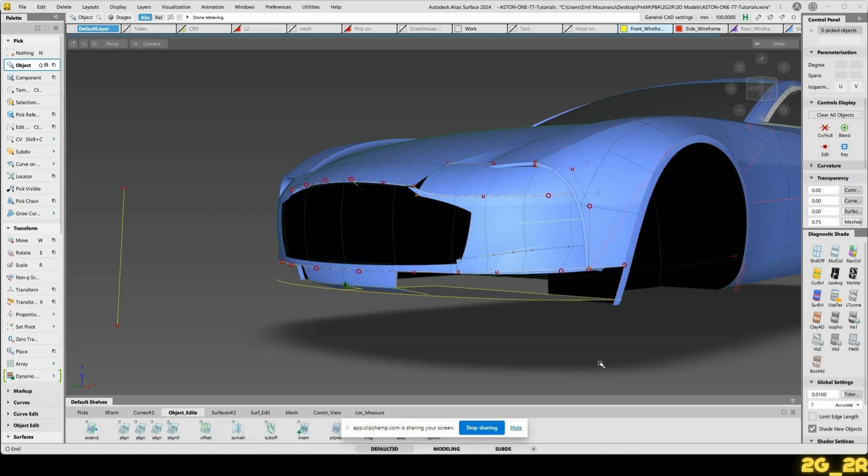So after a short break, I'm back to show you how I'm gonna fill up that area there. So let's bring back the mesh. We see here that we don't need to tuck in here that much, as we're following that area pretty well.

What I'd like to do is take that and follow a little bit more the mesh. So I'll move this out. In the Y direction. And I'll add a few more CVs to this. Now this one needs to move out.

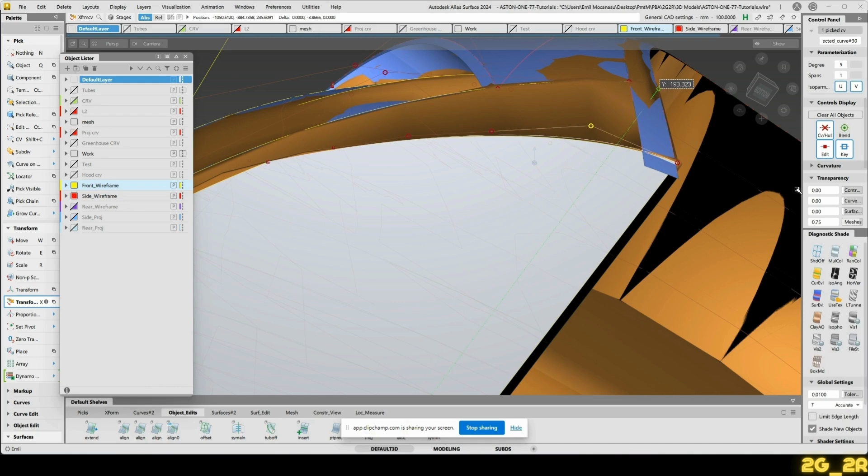Or what we could do, I kind of like this line, but if I want to stick to this scan here, we'll have to take care of that area. So what we need to do here is this line. We'll have to move in ever so slightly. There we go.

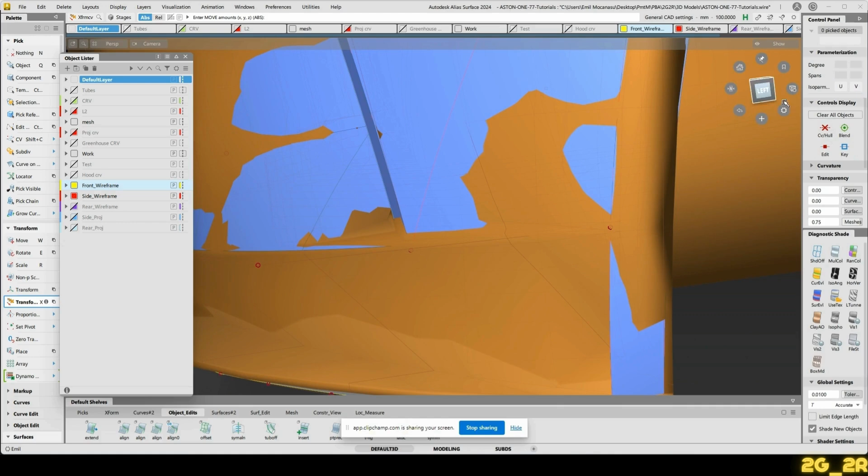And then for this area, I will detach a patch up to that point there and twist it in a little bit. That can be done easily by projecting a line in the side view onto the surface. That will be the line. Let's hide away the mesh.

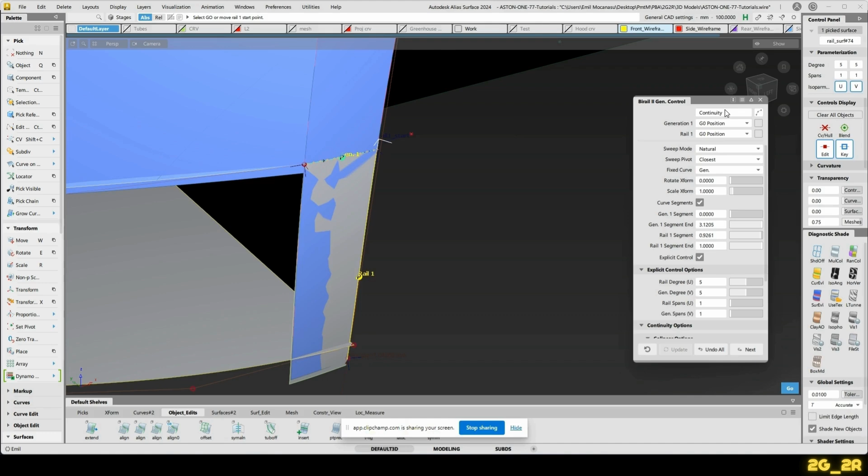And then the easiest way would be to do actually a monorail off of that curved surface along that line, but we will have to turn on curve segments. So that along this line here, and what we do is make sure that curve segments is turned on, and we'll take this controller and we snap it to that point there, and then make sure that generation 1 is set to curvature.

We can trim this back. We keep only that upper area. This we can rotate in a couple of degrees. Bring back the mesh. Then we can start rotating it even more till it looks more like the mesh and what that is doing there. So I would say 8 degrees. We'll do just fine in that area. Perfect. Okay, well, that's that.

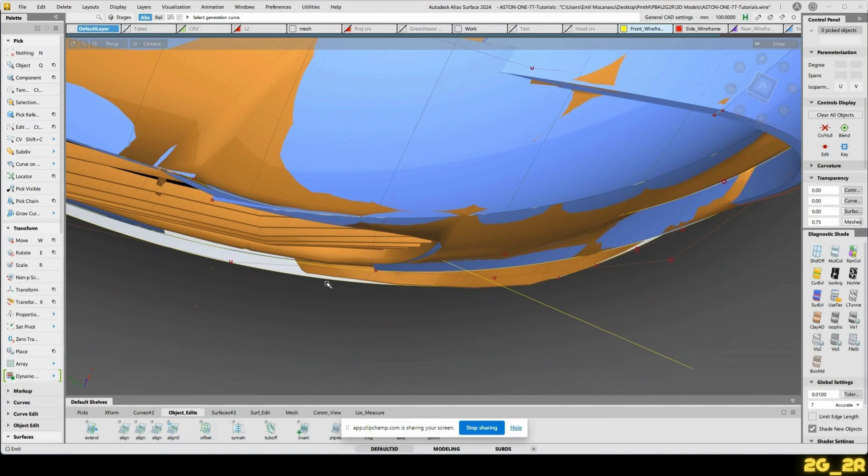I have that line parallel to that one. What we can do is take that last CV out a little bit. Let's just follow the scan in this case. Take this in. This last one out.

And then we extend this line here. It crosses this one. This one goes to that point there. This one take in a little bit. This one more. So for the sake of resembling to that mesh model, I will take that as is. Okay.

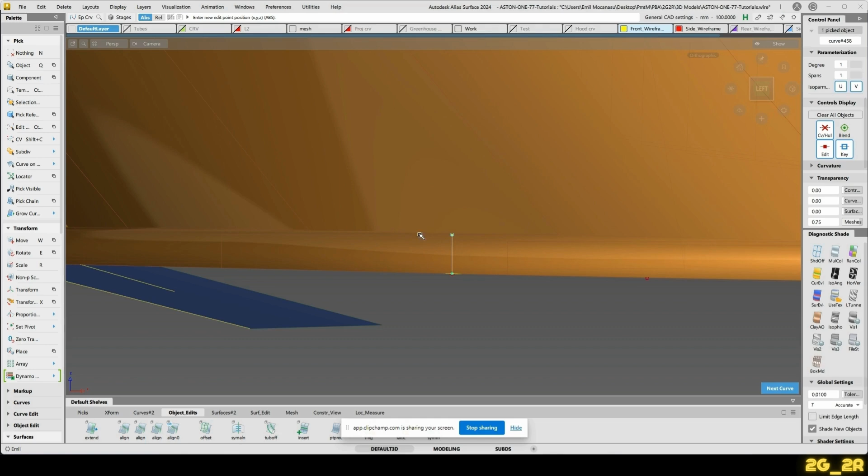I will take also degree 1 line and give it that height that we've got on that plate there. And now I can run this as a monorail on this curve. Here we can give it a tiny bit of crown. Coming out. This one going in. This one going in as well. This one can move out in the Y direction. There we go.

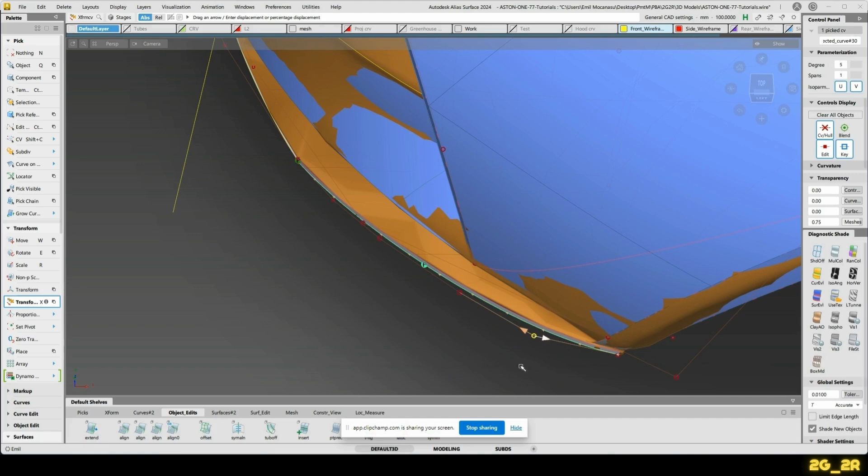You can slide this one in this direction. This one slide this way. Does it? This one can slide that way a little bit. We'll make sure that this is shorter, this one is a bit bigger, this one is the biggest one. Then same again here. This should be the shortest one. So let's pull that way, a little bit out. There we go. The line work has to look as good as it can be.

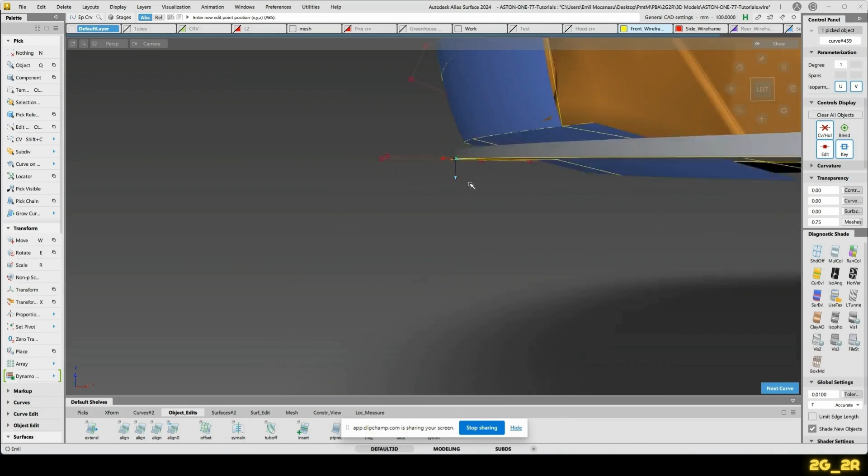Now let's profile this line here along that one. That gives us that face there. And now let's delete this one. I like to work from the center line always. So I'll snap this here, go up, and then snap top of it onto that profile there. So we know we've got the section we have there. And what I'll do, I'll stretch this line to become that from there. So I keep my profile, just delete the second curve that I've done.

Okay, now this will allow me, let's take care of this. This will allow me to do the same thing, but using the natural edge of that surface there. So monorail that along that line there. I'll turn off the curve segments and the explicit control. And I will keep this pretty simple and basic.

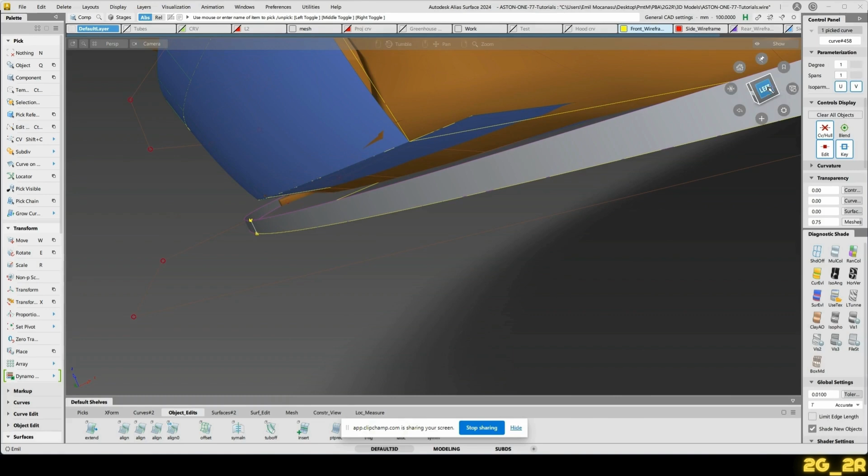What I want to do is maybe add a bit of crown onto that line there. I don't want it to be flat. I want to give it a bit of movement in the section to make it nicer. And this in turn will help us when we will be doing the radii. And now, based on that line, let's generate here a straight line like that. And profile on that line there.

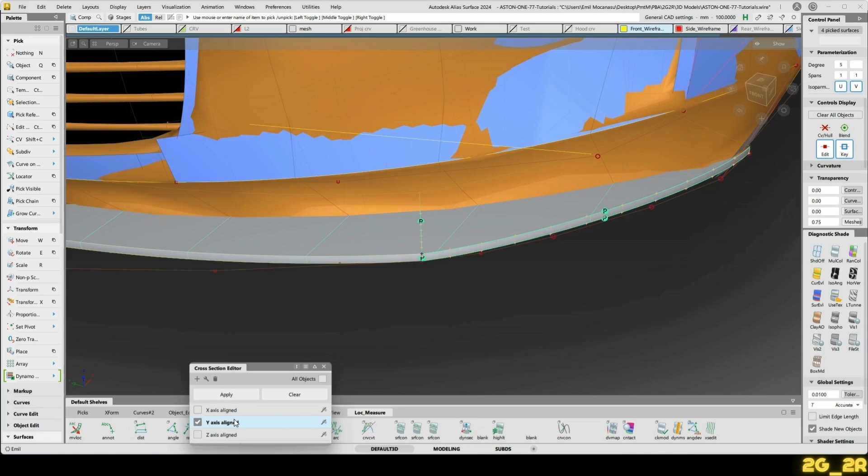Make that curve bigger. So I've scaled it. Now I'm going to run that edge along that one as a monorail. This is the main volume for the splitter. So look at the sections there. We are getting pretty close there. That's fine. These could get smaller. Since we're here, fine.

Let's do it this way. Can make that line ever so slightly shorter. And I'll snap this line to that point, closing everything back up. Let's see how we're doing. Here, we could get closer. Here as well.

What we need to do now: take these two curves, go to the CV there, and snap them back to the center of that curve. All the volume will follow. So we're sitting well there, there. Here we are a bit off. We can tone it down a little bit here, a little bit here.

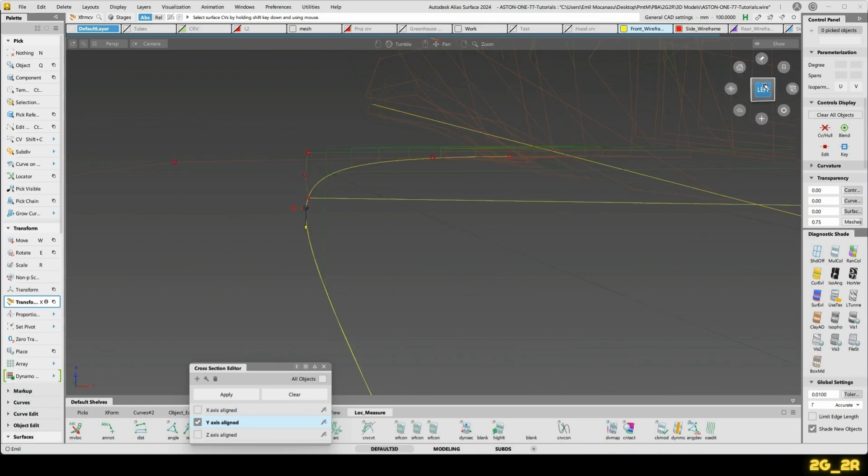And then we will have a blend in this area because it's not going to stay that sharp, so that's all good there. And we could shorten that side a little bit, the center. So I'm going to shorten it even more. And then snap that point back there. And now we're sitting even better on those sections there.

Okay. So most of them are sitting well. Here we're a bit below it, so I will leave this as it is. Come out here a bit. There we go. I'm going to go in a bit. That's that.

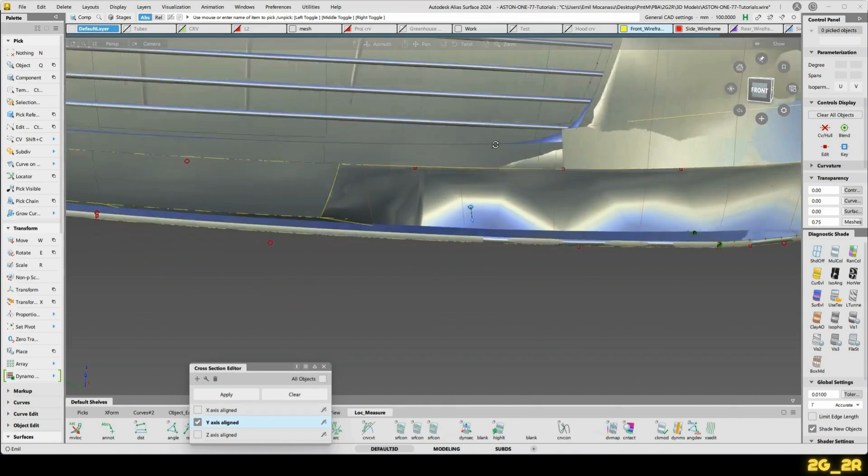Now we will need to generate these surfaces here. One easy and quick way to do that would be to take that curve and move it down there, build a skin between them, and that's it. So I'll try to do exactly that. Let's get away with this. This is interesting here, the way it twists.

So I will be taking that line that we've got there, and I'll just copy it in there, skin between them, or we'll use that edge, that line, and one more there to generate actually a bi-rail there, and then we will be adjusting it so it gets that feeling that the surfaces have got there. So let's do that. Let's set that line, copy paste it, move it across there. Don't worry about the overbuild, because that's exactly what we want.

Now, to make everything a lot faster and easier, I will still generate skin between these two. And to get that in quickly, I'll get some sections here. Perfect. Now what I'll do, I'll just non-proportional scale this line. There we go. We have our section sitting pretty well here.

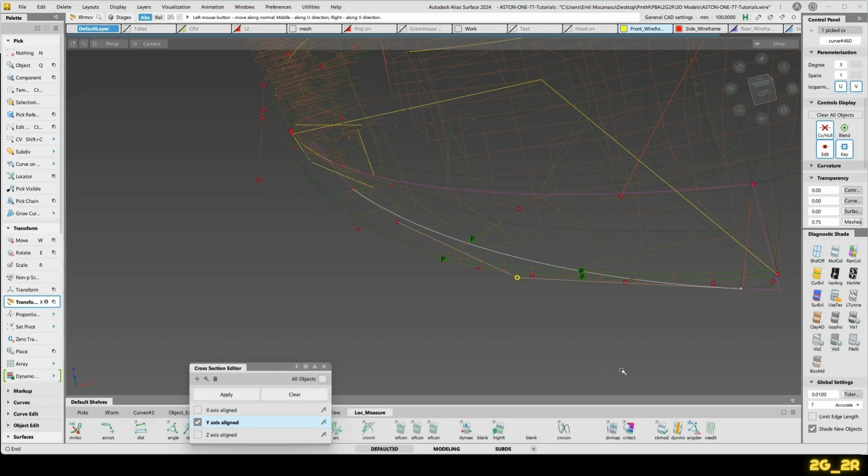Now what we can do is just adjust this line a little bit. So I'll non-proportional scale it in the Y direction because I'd like to have a bigger surface there. Let's use the extend option there. That's good. Let's scale it back in X direction. All good. This last point, both working well. Since we're sitting pretty good on most of those sections, I'll leave that as is, and I'll accept that deviation there from the scan because it's going to make the surface look better. Looks okay.

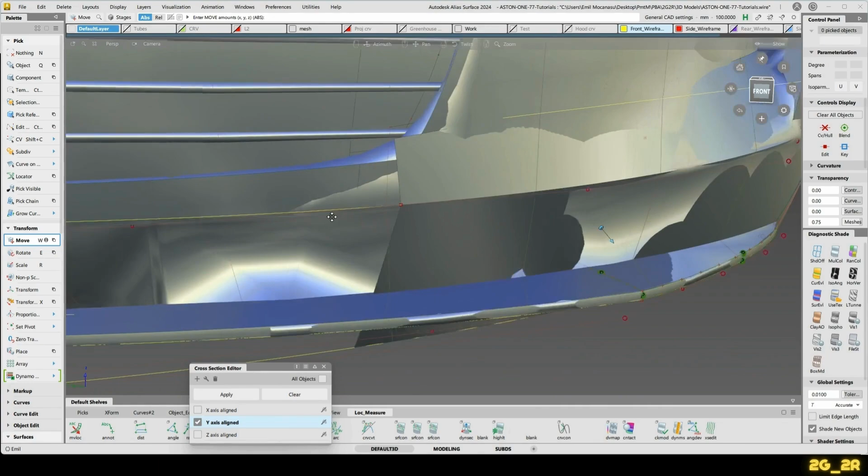The outline, the surface, and we know that this curve is aligned to this one curvature. So we can actually generate here a monorail, connect the curvature. We will be using only this side of it, so that's okay. Let's run some sections on this one, see how we're doing.

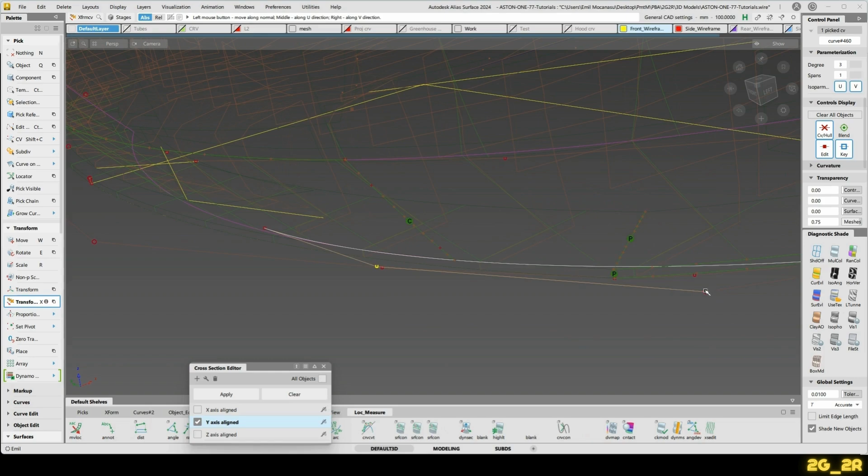So we can actually move this in a little bit. There we go. This could come out ever so slightly. This one as well. So we have that there. That's looking good. Now, the interesting part will be going from that surface to that line, and by the looks of it, I think I will be just blending curvature to position onto that line there, and that's it. So let's go ahead and try and do that.

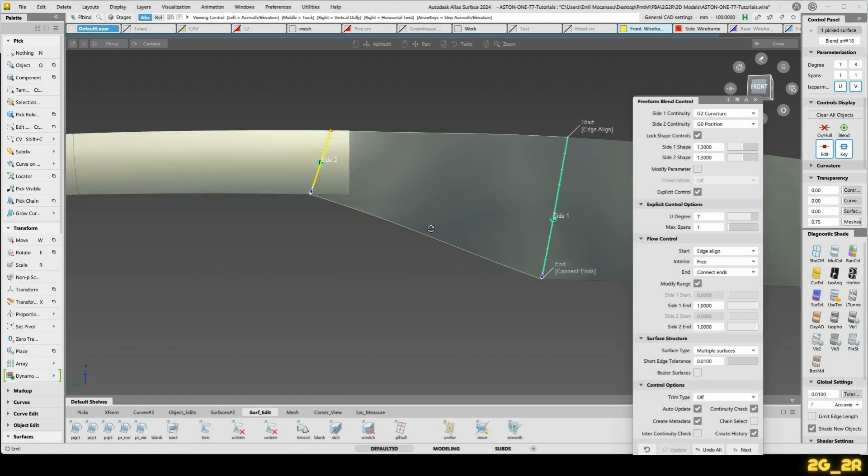So from here, I'll bring in a line that looks, actually what I'll do, I'll do it even easier. Let's untrim this surface and then go with a blend. I'll align this edge line. This will be connecting, and I'll do curvature to position there. And I'll just take that curve there and duplicate it. Make sure that the shape of that blend is set on to 1. I'll duplicate that.

These are very easy and quick ways to generate surfaces. See where you're roughly at, and then generate your nice curves and work from them. There we go. This control. Side 1 will be set to curvature. And we know it's working. We can trim this back. Sorry about that. Now let's look at this section wise.

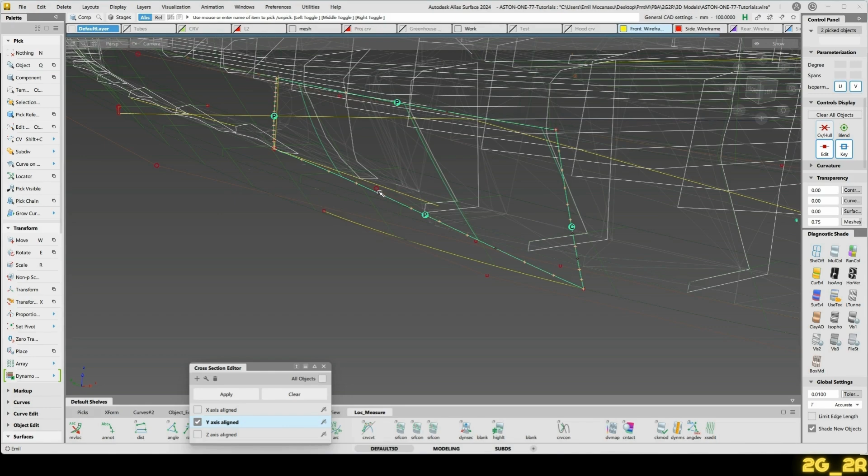Deviating a little bit. Let's look at this one here. So we could come somewhat closer to the sections on the mesh model, because we are a little bit off. So that line needs some adjustment. There we go. That brings us pretty close.

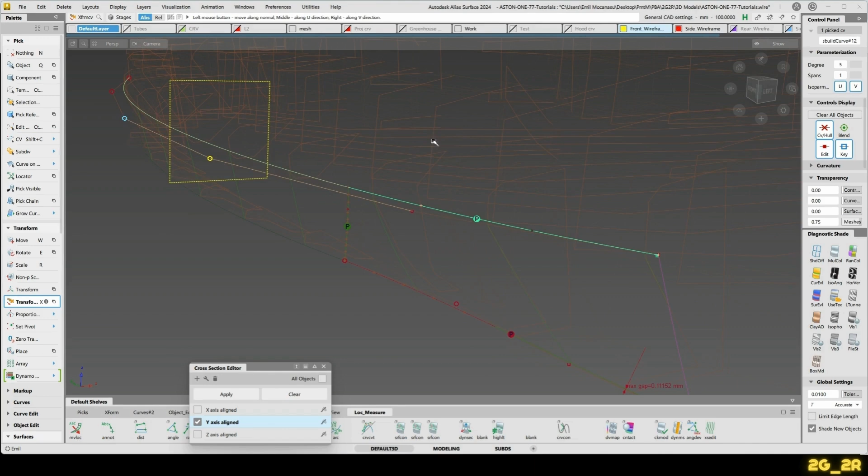It's even closer now. That's sitting pretty well there. Let's see what we have to close back up. Since we've moved some curves, others will follow. Let's hide away the mesh. As I was saying, things are not happy.

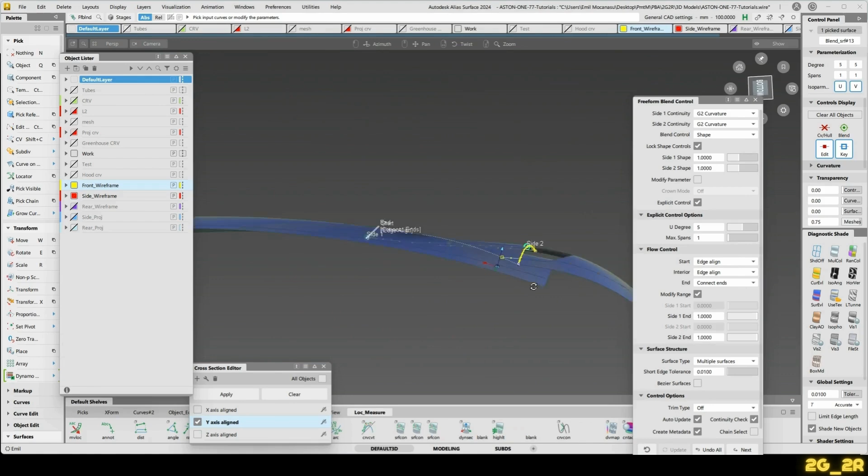It's a common problem that you get when you work a lot with freeform blends in these surfaces. This one jumped from where it should be, and it's aligning to a different surface there. And this is the reason why. So let's go back to that line there.

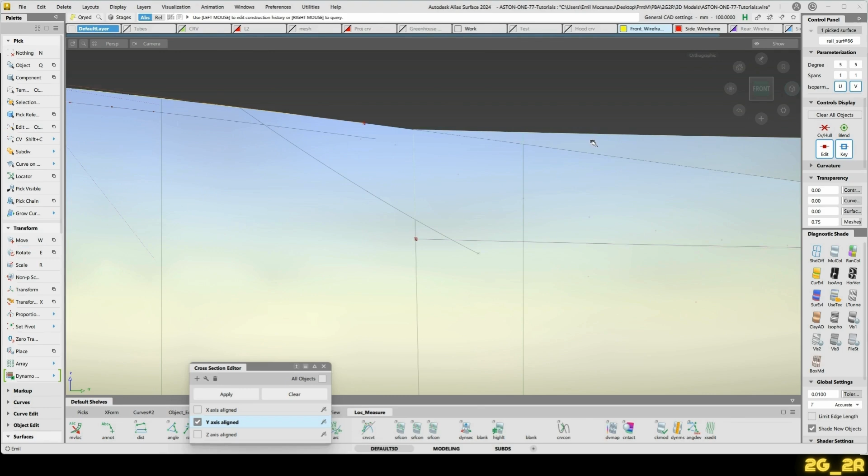This line needs to realign to that surface. See the result of this closing back up. Still not working. At least that's working, so we can rebuild this. Entering the surface again, this one.

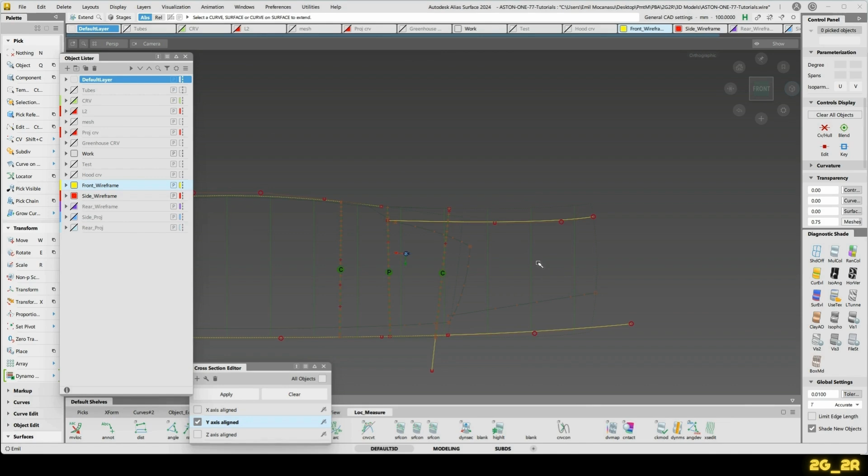Sometimes this is the cost of working with these flexible surface structures to keep the history. Sometimes it's just not working. So like that, on that line, so it hits the top there. I've overbuilt this. I'm going to normal project onto that surface, that line. And I'll just make sure that I reproject these lines to make sure I keep everything that I had in place before.

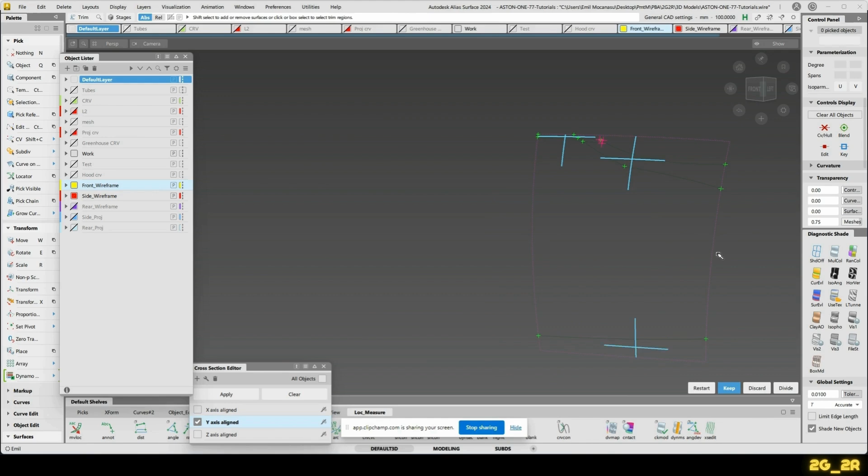So I've reprojected everything. I'm just trimming it back to keep just what I need. That's about it. These would go onto their proper layer. Now I need to see why this one is not working.

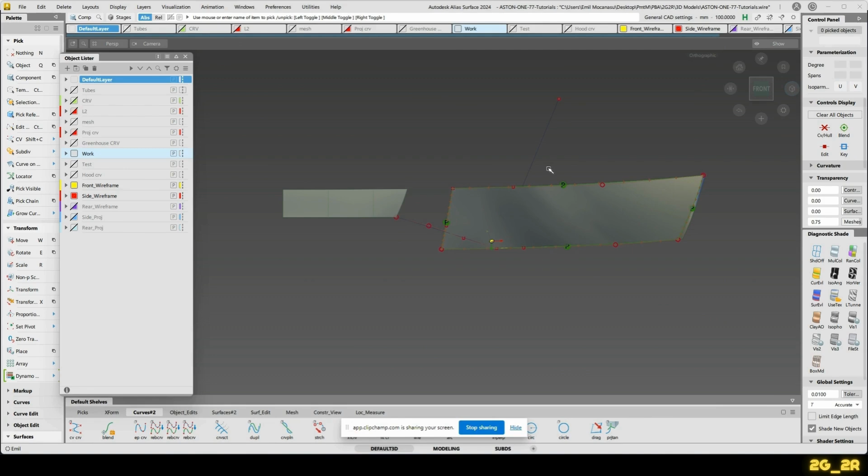And now let's make a projection from that onto that one. We'll need to see where this curve lands onto that surface there. So with a stretch tool, I'm just project aligning that line to that endpoint of that curve. Projecting in the X direction. And now let's do this again.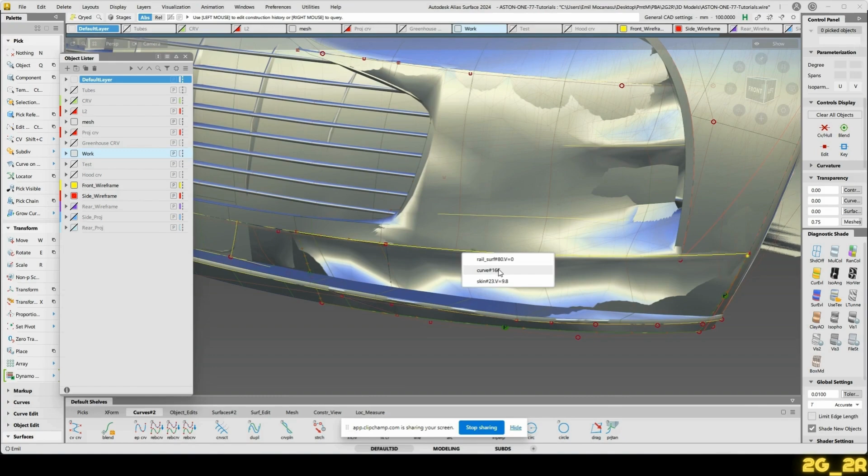Since I'm aligning here, that's where it should happen actually. Let's bring these curves back. Let's see all this compared to the mesh. That curve needs to align to that endpoint there. This needs to come out. Okay. Now the mesh needs to go back and go away again. Let's bring these back up again.

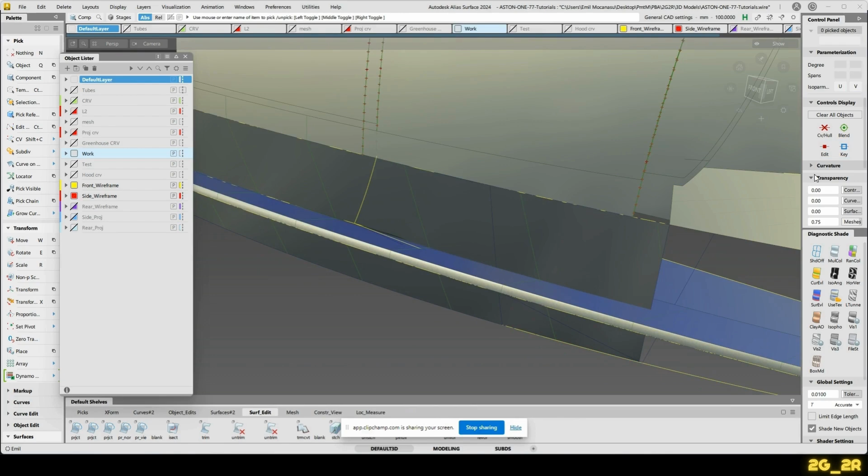So let's introduce here one more surface. Basically, a transition from this one all the way there to that surface. And by default, this gets trimmed back. This one gets trimmed back. That will serve as that transition that we're missing. Let's project onto that surface this curve here. There we go. We'll take that curve that we have there as well. This one as well.

And then I will turn on the CVs on this. Snap this roughly to that position. Well, it has to be exact. Roughly doesn't do it. And we will be using now that edge of that surface to build the surface we were missing here. And we're still not aligning properly. It means that the surface that we've got there, these two curves, we have to bring them back together.

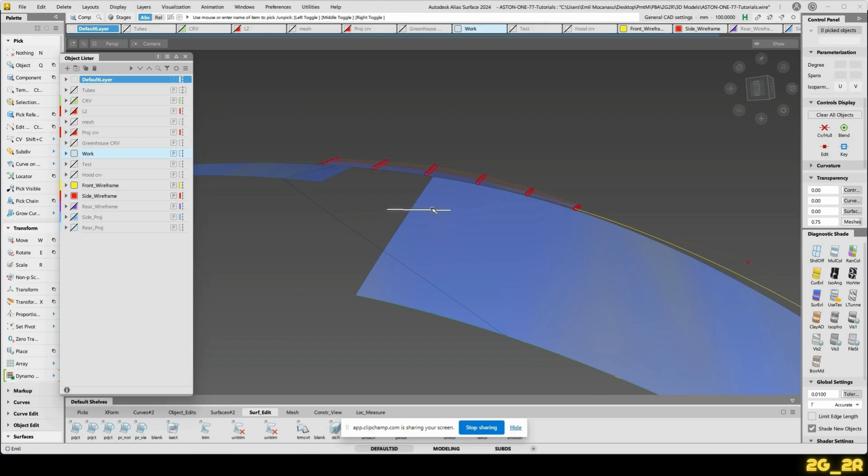We will need this curve, this one here. Let's extend this curve back to that line there. This curve, we just pop it onto that one, and we'll snap it to that one there. So this way we will have a natural edge here, and we can build that again. There we go. Let's bring back the mesh. Try to optimize this a little bit. And that means that we will aim to get that working nicer.

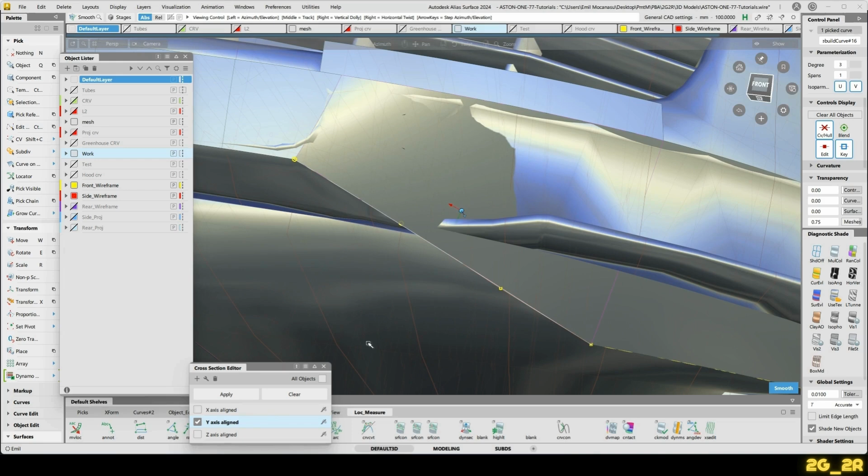So here we're okay. That curve could become a degree 5 curve. And we can push this in. This one also in. We can go even more in. So since we've got that happening, it means that in this area we actually need a surface coming off of that line, going steeply in, intersecting with another surface coming this way. We'll have a blend that way, and then the radius going this way. Because if not, the S here will be too strong, and I'm not so keen on something like that.

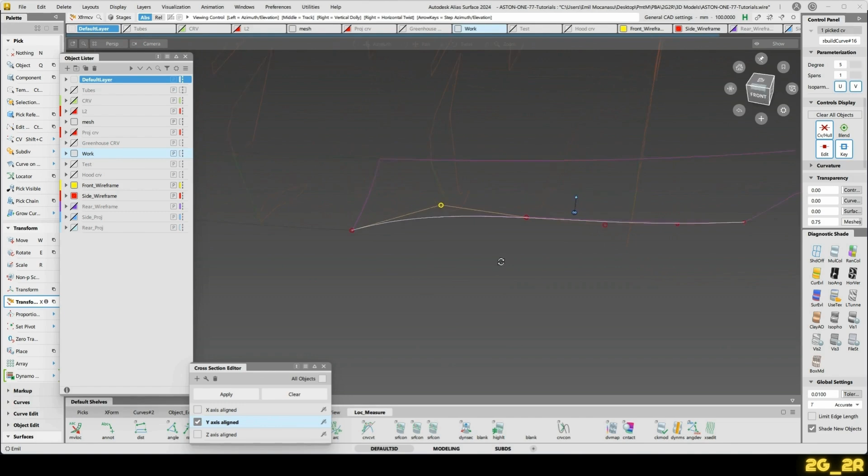Let's try this out of one surface first. This one goes in as well. This one can come out. Not something I'm very keen on. Let's see the whole situation together. Now this surface. This will run to a certain degree. We can extend that curve, which in turn makes that surface bigger. We'll take these two, hide them with that one. This curve can be adjusted to push that point down. This one can come in a little bit, so we're resembling that even more. Now we're okay. And on the explicit control there, 5 by 5.

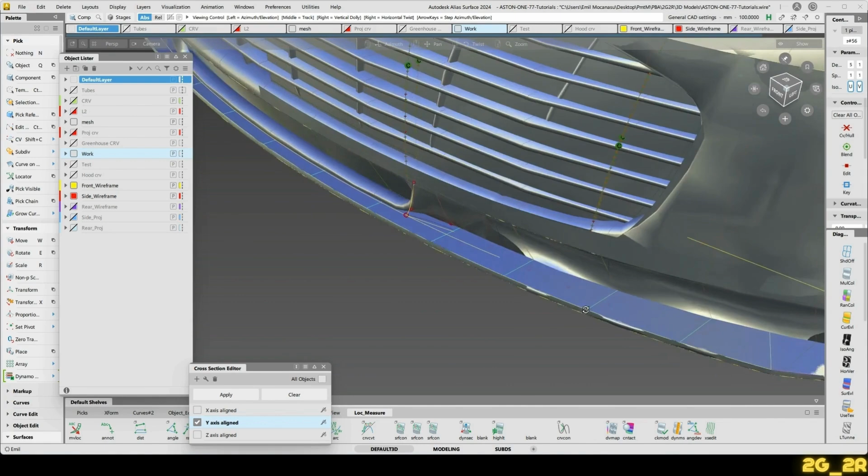What we can do also is get a curve in here, running in X, like this. This as well. Calculate division. And then try to get them in. So first of all, turn it in. Make it look like that. And now give it a degree 2. Let's see, we can go forward with this one as well.

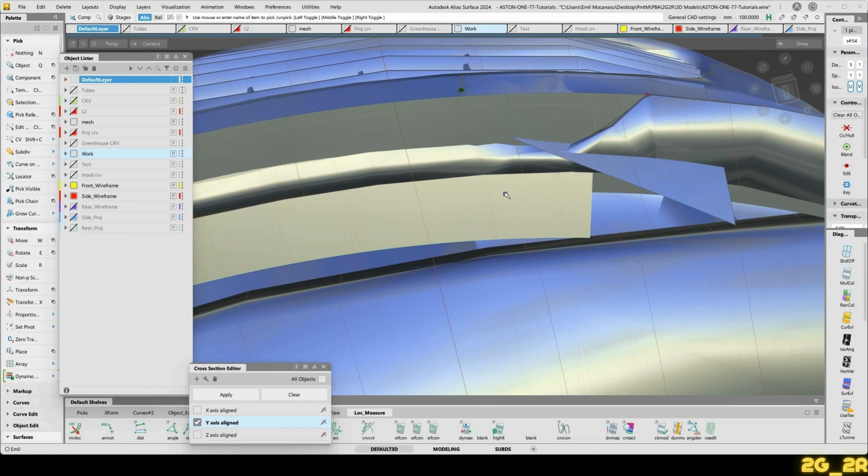And then this means that we can project in Z onto that surface, this line, and trim it back. And then intersect this line also with this surface here. And from these sections, we can also adjust that. So let's take that line.

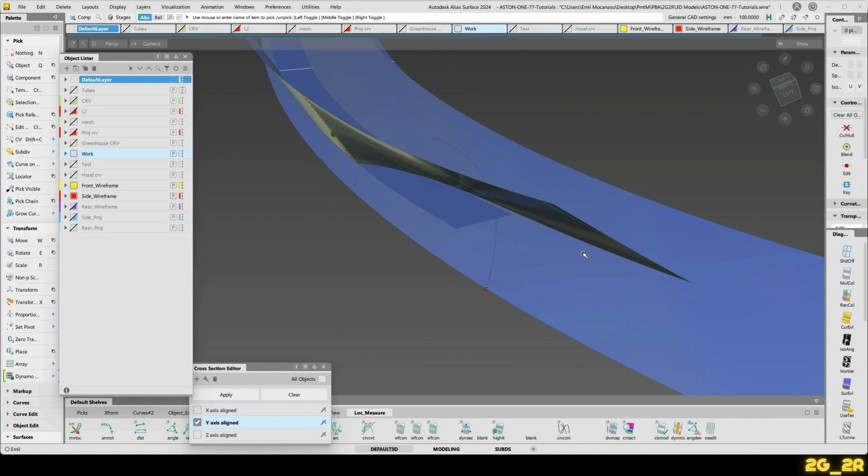I was looking at the wrong line, so we need to take that line there and adjust it so we're matching the center section there. Okay. Let's hide away the mesh. Let's bring this back. Let's intersect this.

We need a center line as well on it, so we'll take that. X projection on it. Now we can keep that area. That's it. Now this one, it's trimmed back to this point as well. It's looking pretty decent. Let's do just a normal radius on this one.

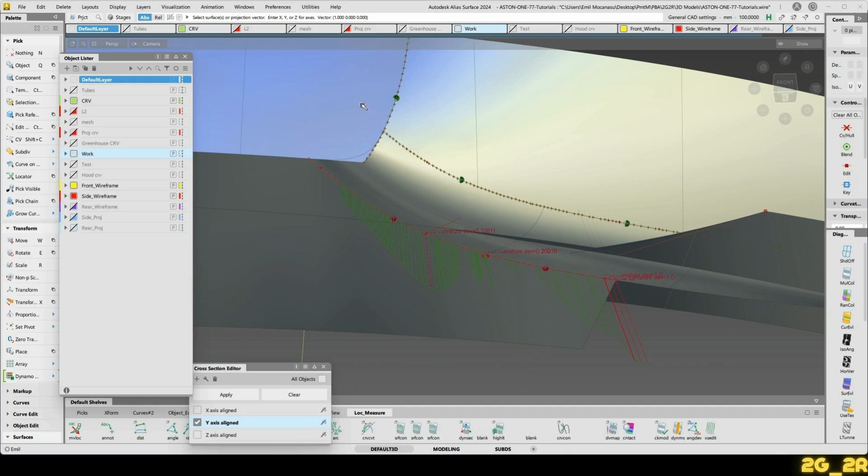Save first. Let's do this. The end should be extending. Let's increase the size there. Bring this back. Now let's bring back mesh. We can see we can go pretty generous there. Say 50. Looks more like it.

What I will want to do is take this, take that, and now I will want to generate that contour there. So that means that for me, the easiest way to do it would be just untrim this surface once again, and then I'll go to the offset, let's say 7 mil. I'll keep that. 7 mil off of that. And 7 mil off that current surface.

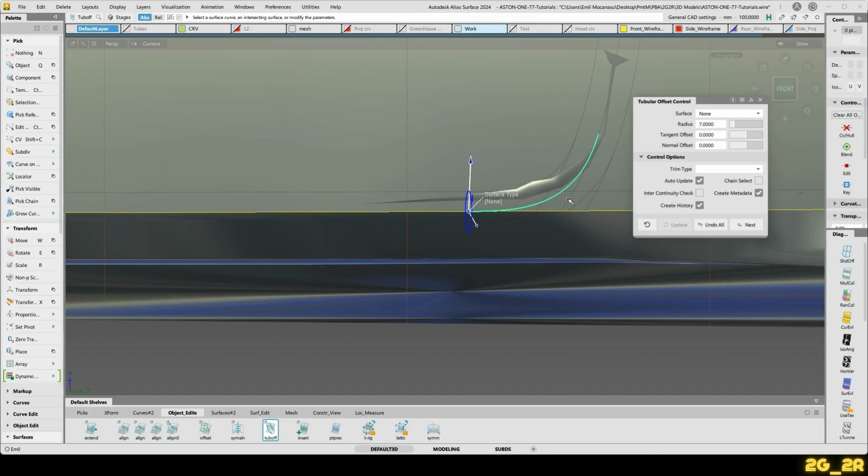And then for the moment, I will also generate an offset of this. Actually, I will not generate an offset. I will take out there. I'll generate a new surface just to blank this off. Do it from around here, going up to that point there. Extend it a little bit and profile this curve around this one.

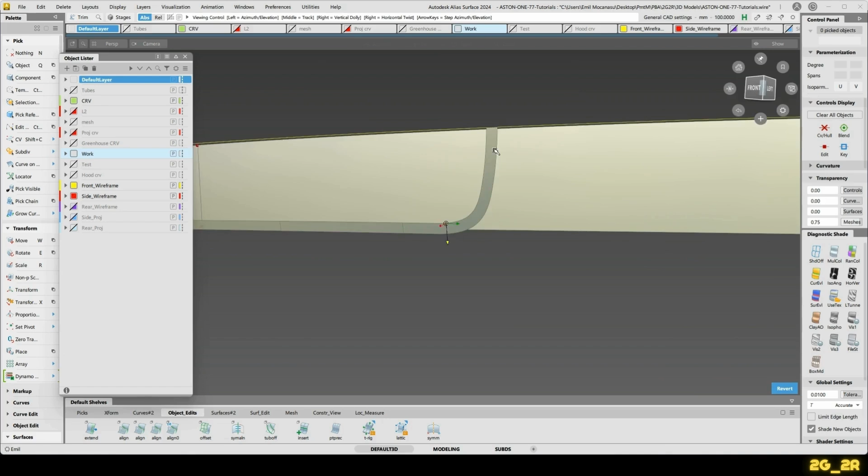Then I'll hide away the mesh. And then trim all this back to keep just what I need. That's that there. Trim this blank-off surface as well. We don't need. We can run now the surface this way based on the mesh.

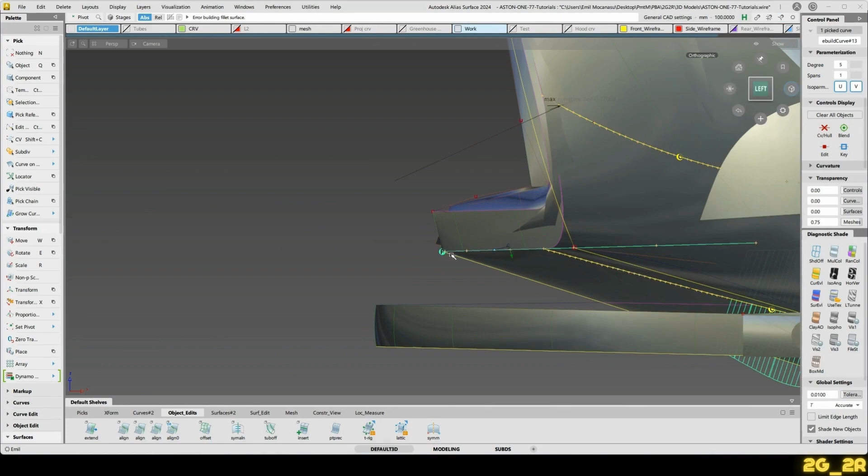That will do. Let's make it a degree 2 so it's not a flat surface, and we pull the rear area down. This moves the car forward. We've got a nice acceleration to the end of it. You can also see that this could be fine-tuned. In the means of, I could rotate this Y direction, make it come up. And now I'll just have to realign that point there. And everything will follow.

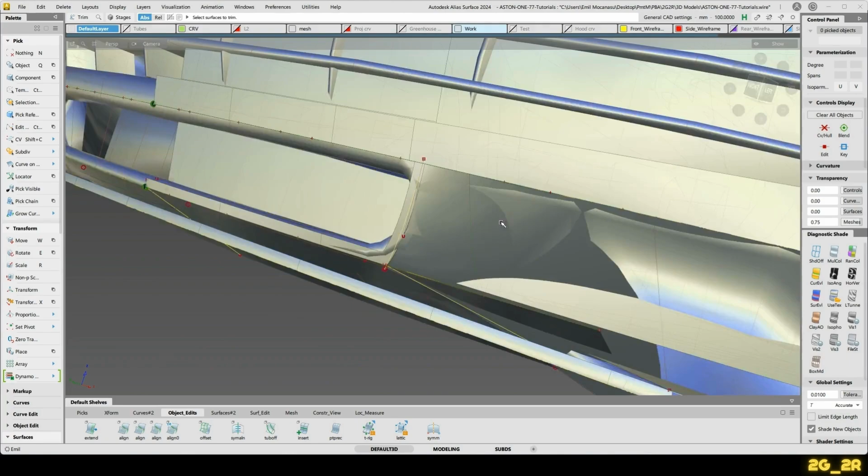So what I've done is try to come closer and closer to that line in the mesh. And here, what I want to do is just take that point there and bring it back onto this curving surface here. That I will undo. And let's see this again. This is failing to update. I might need to rebuild it.

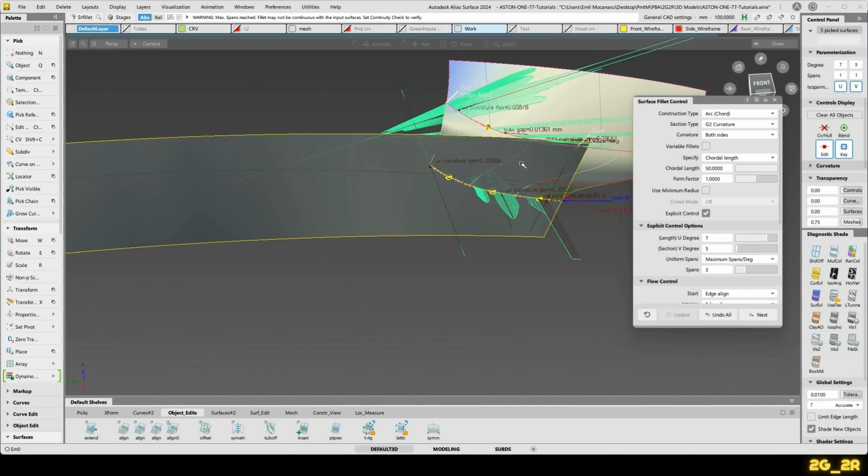I was realigning the wrong curve, so that one I don't need. This one comes down to here, and this is why you need to make sure you're always working clean, because then everything will update nicely. There we go. Let's do this again. I think we had 50. This is not working at the moment. We'll have to look at how we build all that again.

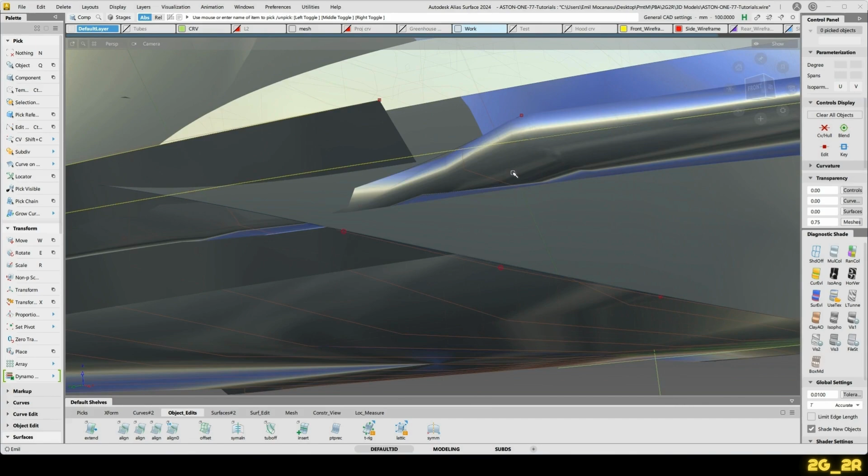But in the meantime, the important bits are working. So let's look at that whole area there. So let's do here. Let's surface along that one. Project to that surface, that line. So we keep going with that. Intersect this with the base plate here.

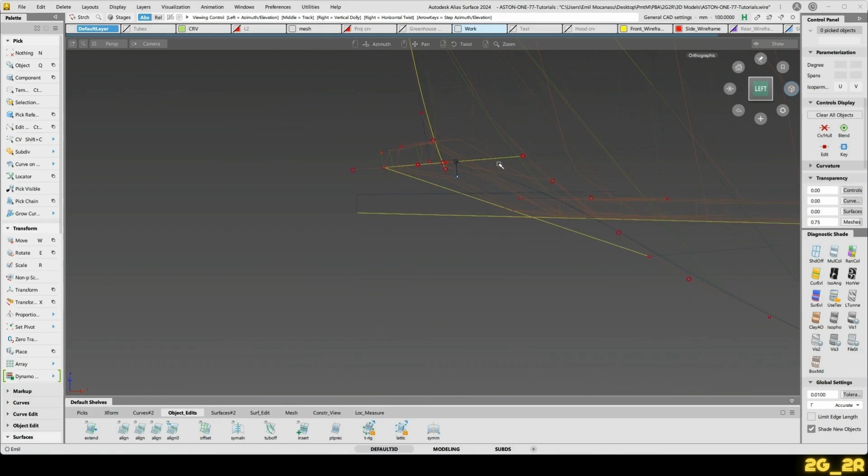Okay. Let's look at all of this again. This is twisting out this way. What I'll do for that, I'll copy this curve here, place it onto the end of that line. And then I'll delete this surface and I'll skin these two lines.

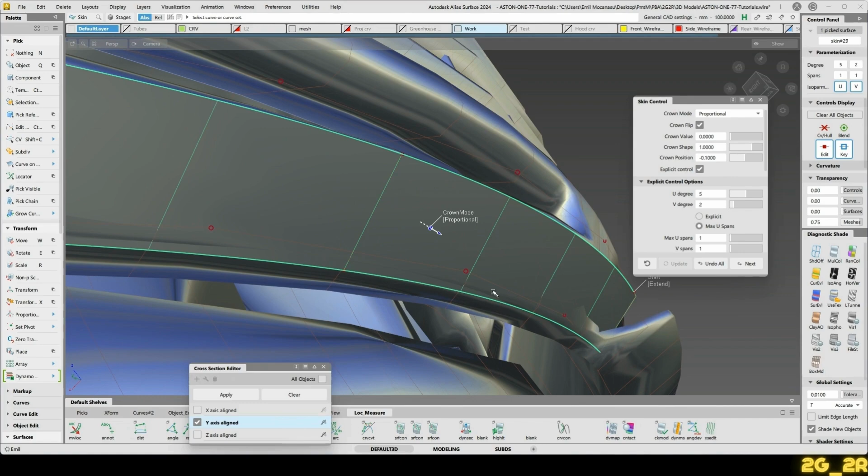Okay, now it's a very odd section there. What I'll do is twist this out, so it's hitting these sections in a better manner. Now extend this to that line and move it out a little bit, so I can actually intersect that surface with this one here. These will also generate me that. Fillet goes after.

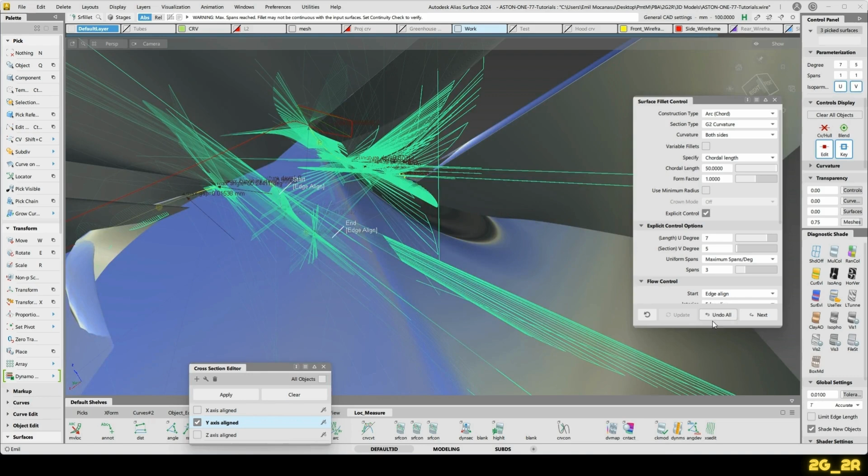Always save before you do a fillet, because sometimes you can have these moments where Alias would crash, so you don't lose your work. Having edge align turned on everywhere makes everything a lot more difficult for Alias to do the math on it. So use default, and then we'll put edge align on this edge here, and see where this takes us.

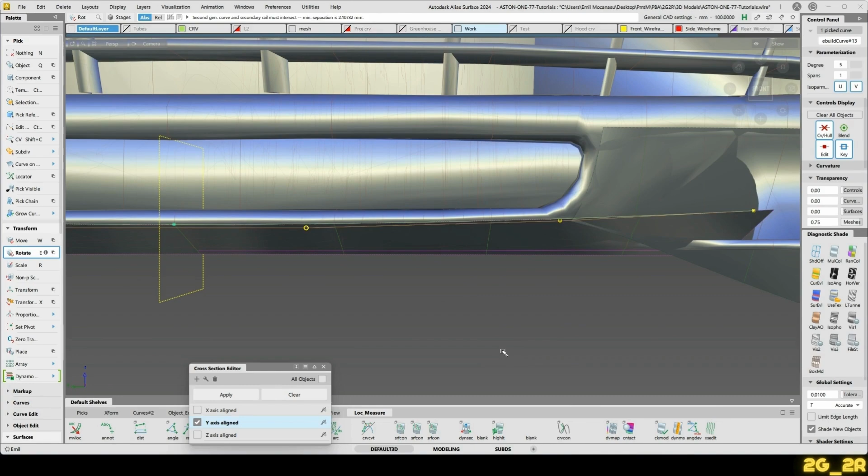But this doesn't want to work, so we'll have to do it a bit different. We'll work with a freeform blend. You see, this is accelerating up here. What I'll do, take that line, and I'll rotate it even more in my direction. And then realign these things. Now what I'll do, I'll take some lines and build this blend here. So one around here, going this way, one around here, going that way.

Let's hide away the mesh and project an X onto these surfaces. This one goes away. And then I'll just do a freeform blend. Curvature there. And here I'm going to do connect ends with default. Connect ends will do. Pull this back a little bit. This one could become a bit rounder.

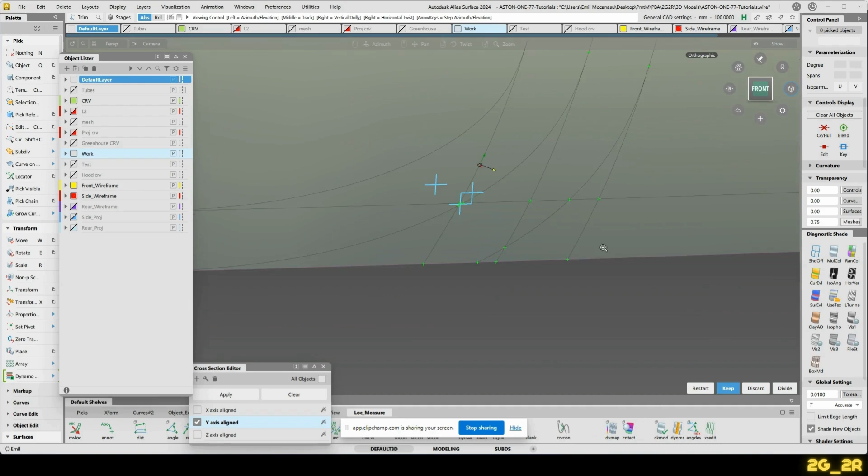My intention is to keep the patch layout as simple as possible in the first place, and then we'll see how we have to adjust these areas. Now, these are in a good place, so I can project the edge there. I can build this lip. I know I'm deviating from the sections, but I'll keep it simple for the moment. Later on I will see how I adjust that.

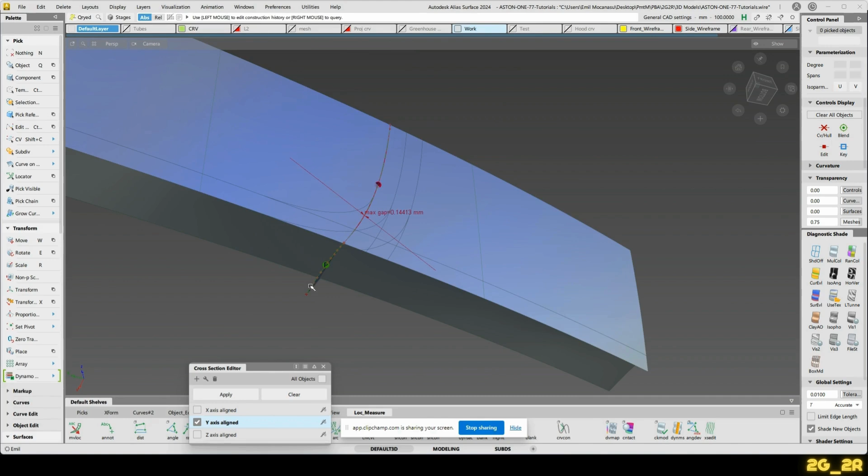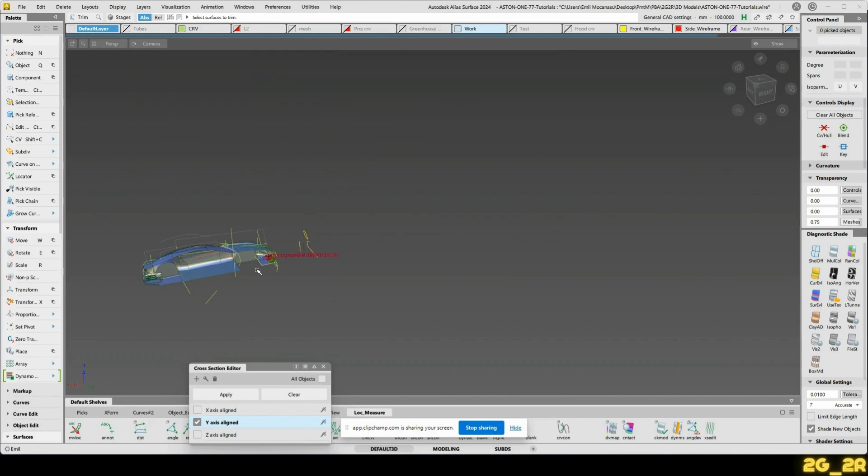Some projection lines. Now projected normal to the surface. So this one, that, this one, that way. We'll do a blend between the two. Now project that edge there. From these back. Bring that line. Trim this one in the center of it. This gives us these surfaces.

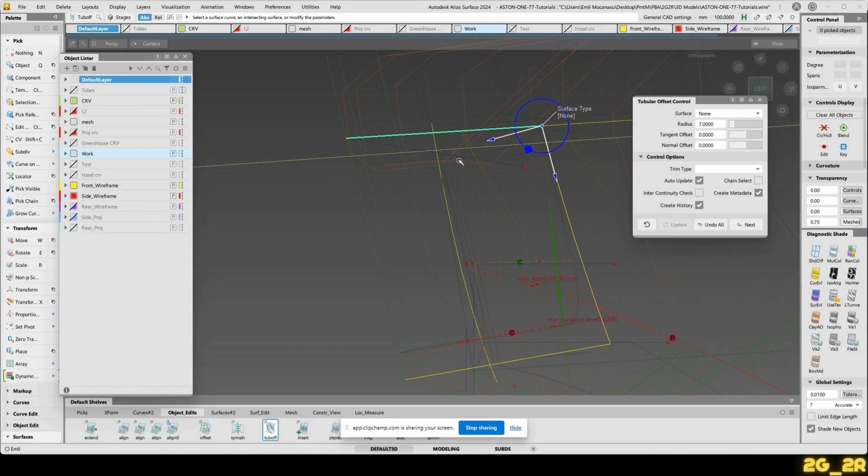Then here, we'll go this way in. Let's see what the mesh does. Here it sits lower. So all we can do is actually untrim this. And then do the same thing, tubular offset on plane. So wrong offset there. So this could come even lower. 8 mil. Take that. Put it down there. Change the inclination. So you need normally X in X, and a couple of degrees on it.

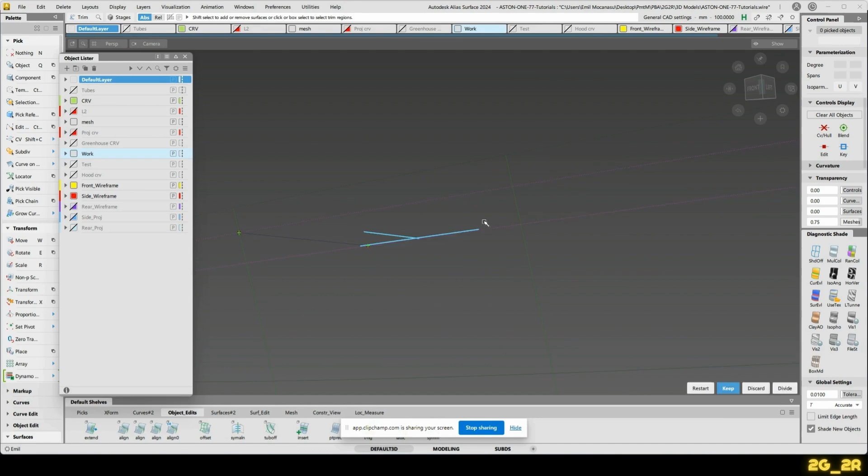And then let's profile this along that line there. Turn on explicit control. Length, let's do 5 because that surface has 5. Okay. Let's take this. Move it along there. Project onto that surface, the center line. Trim this back. Trim this one as well. Back. All its necessary regions.

Let's take this and these 3 surfaces that we've just generated. The intake area down there. Let's intersect that around there. We can keep this bit, keep these bits, this one. We can intersect this one with the side one here. There we go. That's the pocket down there. Let's hide away the mesh, the lines.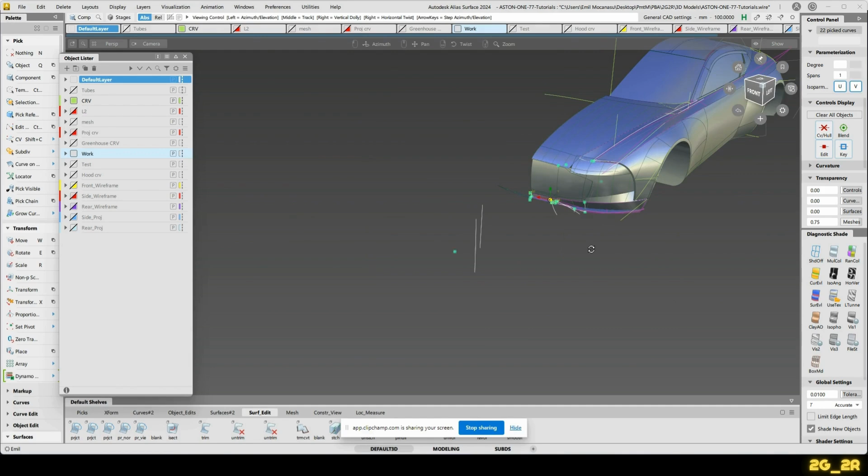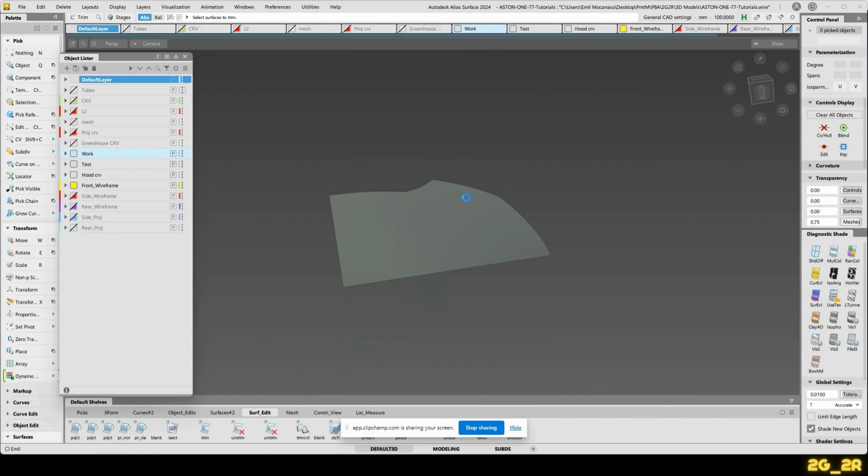Let's put this on here. This needs trimming back to the center. Outline there. Surface there. So I'll be looking at that there. I got on to work as well. Trim this back. So that's that.

Let's hide away everything that we've got on the work layer. These go back. These go onto the work layer. These back again. Now these will get intersected with these surfaces here at the bottom. Let's trim everything back. That goes that way. Go back. That goes. That needs to be intersected also with this surface here.

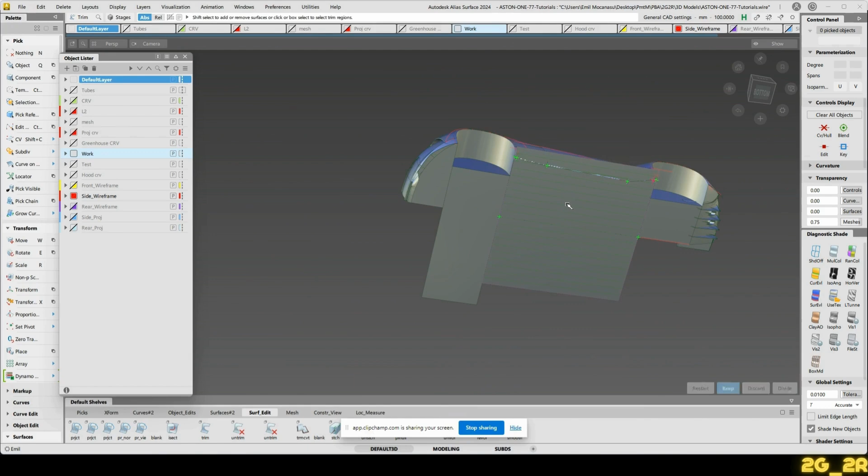So I've also filled this up here, trim this back. So that's it for the main volume of the front. More fine tuning will follow, but that's how I get this in. We will do the grille when we start detailing everything, when we close everything up, after we've adjusted all that. But that's it for the main front area.

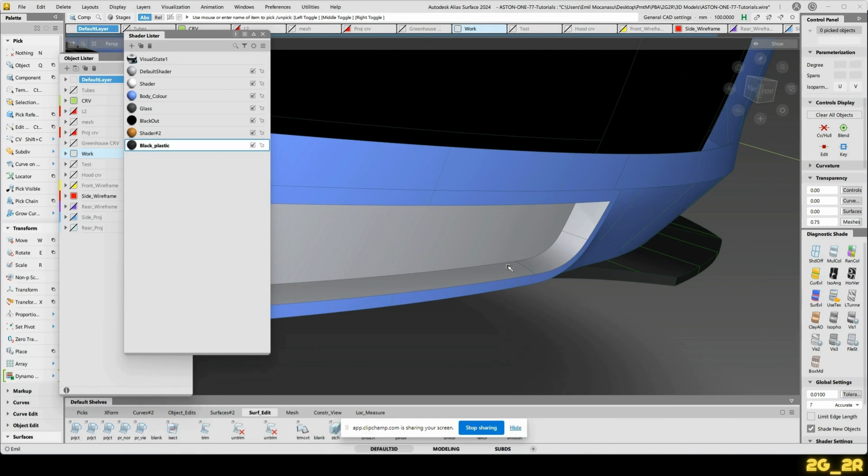And let's pick these surfaces. Color them in correctly. These ones here. We'll do it like this. These ones go also blue. So there we have a rough base volume for this car.

And in the next episodes, we will start closing this hood up so we can close that gap up, and then work in other details like the grille, the headlights. Then we will be jumping on to the body side, carving in here the side feature of the One-77. After that, we will be aligning these surfaces here so we don't have that break there. We will be closing up that gap there, finishing up the details on this. Another important bit will be this transition here, blending that step by step, finishing this up to make it look like the real deal.

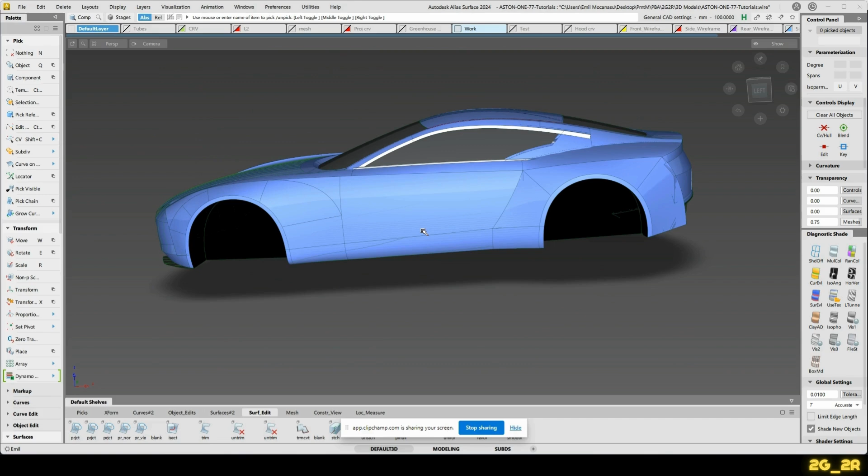And once we have that, I was thinking we could do a nice little tuning project on it, so make it like a track car look, widen it, work on some of these things to make it extreme or not. Let's see what gives.